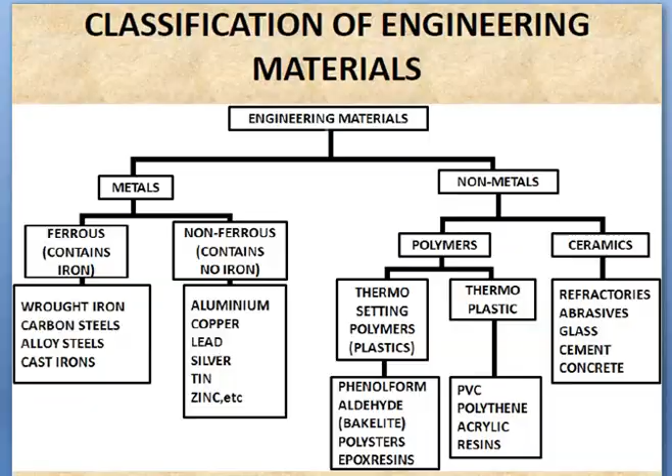The important mechanical properties of materials are elasticity, plasticity, ductility, brittleness, malleability, toughness, hardness, strength, stiffness, resilience and creep.

First we'll start with the property strength. Strength is defined as the ability of the material to resist the external forces causing various types of stresses without breaking or rupture. Or in simple words, it is the ability of the material to resist load without failure. Based on the type of stresses induced by external loads, strength is expressed as tensile strength, compressive strength or shear strength.

First, we'll look into the tensile strength of the material. Here in the figure you can see that a component is subjected to two equal and opposite forces. So here the tensile strength is defined as the ability of the material to resist a stretching load without fracture. So this is called the tensile strength of the material.

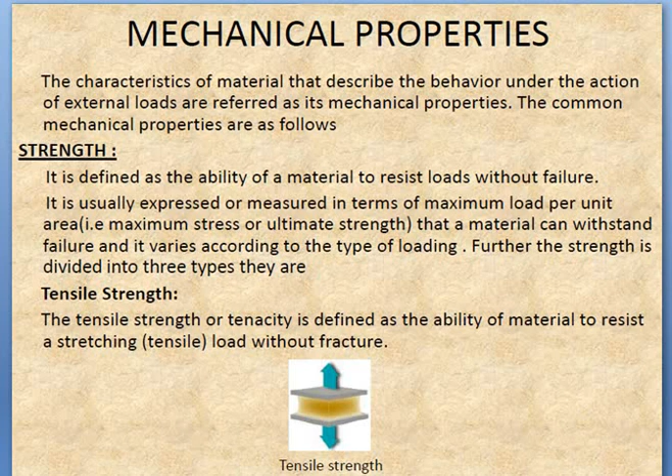Next we have compressive strength of the material. For the compressive strength, please refer to this figure where you can see the component is subjected to two equal forces which are acting towards each other. So the ability of the material to resist compression or squeezing without fracture is called compressive strength.

For the shear strength of the material, you can refer to this figure where the component is subjected to the transverse load. So shear strength is the ability of the material to resist the shear load; shear loads are loads tending to separate or cut the material. The ability of the material to resist such type of load is called the shear strength of the material. In simple words, the ability of the material to resist the transverse load is known as the shear strength.

Next we have stiffness of the material. The stiffness of the material is the ability of the material to resist deformation or deflection under the load. Within the elastic limit of the material, stiffness is measured by the modulus of elasticity. When the material is more stiff, it can resist the deformation, and when the material has less stiffness, it will deform easily.

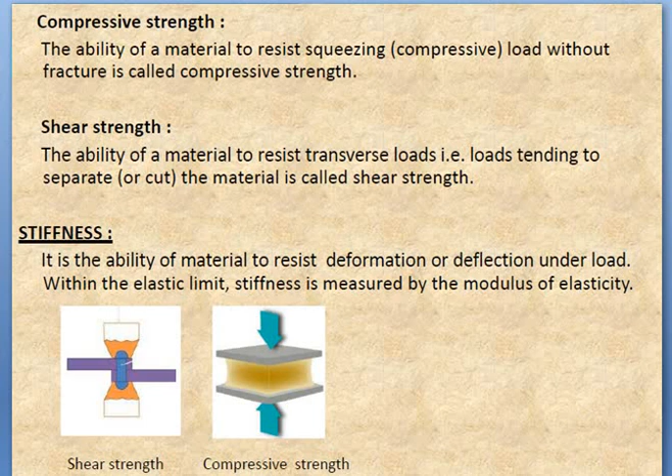The next property is elasticity. Elasticity is defined as the ability of the material to regain its original shape and size after deformation when the external forces are removed. Steel is perfectly elastic within a certain elastic limit.

Next we have plasticity. Plasticity is defined as the ability of the material to retain the deformation produced under the load on a permanent basis. This property of the material is necessary for forging, stamping, images on coins and ornamental work. So in plasticity we have to understand that whatever deformation of the material happens will remain permanently even after the removal of the load. Such a property is called plasticity.

The next property of the material is ductility. It is the ability of a material to be deformed plastically without rupture under the tensile load. Due to this property, material can be drawn into fine thin wires without fracture. A ductile material must be strong and plastic. Ductility is usually measured in terms of percentage elongation or percentage reduction in cross-sectional area of the test specimen.

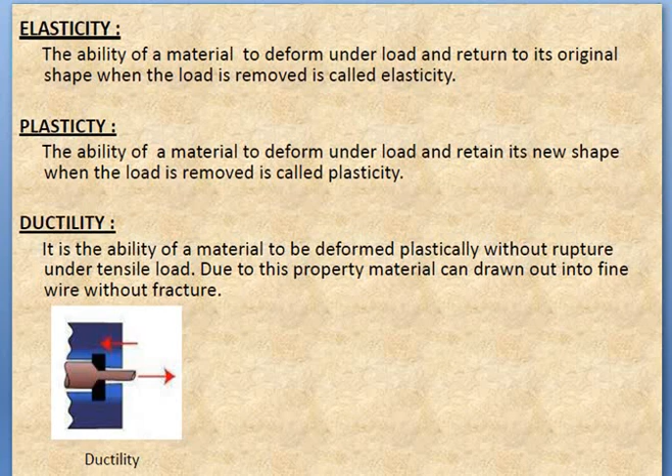Next we have malleability. It is the ability of a material to be deformed plastically without rupture under compressive load. Due to this property, metals are hammered and rolled into thin sheets. So because of the malleability property, materials can be made into thin sheets. So this is also one of the important properties of the material. Next we have toughness.

It is defined as the ability of the material to absorb energy up to fracture during the plastic deformation. Toughness of a metal offers the resistance to breaking when force is applied. Toughness is measured by a quantity called modulus of toughness, which is the energy required per unit volume of the material to cause rupture under the action of gradually increasing tensile load.

Next we have brittleness. Brittleness is the property of a material opposite to that of ductility, that is lack of ductility. It is the property of a material which shows negligible plastic deformation before fracture takes place. Examples of brittle materials are cast iron, high carbon steel, concrete, stone, glass, ceramic materials, etc. Glass is an ideal brittle material in which the stress-strain curve in tension is essentially a straight line. So we can say brittleness is the property of sudden fracture without any visible permanent deformation in the material.

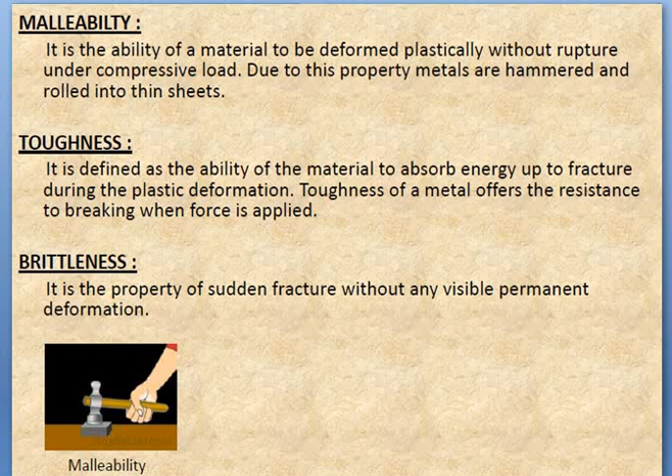Next we have hardness. It is defined as the ability of a material to resist scratching or indentation by another hard body. Hardness is directly related to the strength. Hardness of the material depends upon the resistance to plastic deformation. Therefore, as the hardness increases, the strength also increases. Tests on hardness may be classified into scratch test and indentation test.

Next we have creep. The slow and progressive deformation of a material with time at a constant stress is called creep. Whenever a member or part of a machine is subjected to a constant stress at high temperature for a longer period of time, it will undergo a slow and permanent deformation, which is called creep. This property is considered in designing IC engines, boilers and turbines.

Next we have fatigue. Failure of material under repeated or reversal stresses is called fatigue. Machine parts are frequently subjected to varying stresses and it is important to know the strength of material in such conditions. The maximum stress at which the material will operate indefinitely without failure is known as endurance limit or fatigue limit.

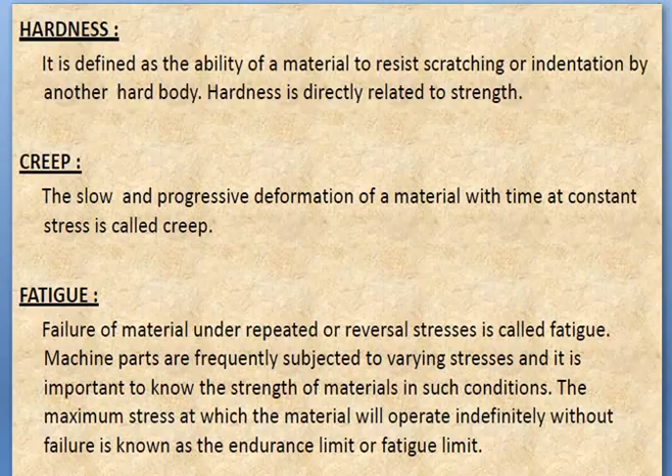So these are the important properties of engineering materials. These properties we call the mechanical properties of the materials, and these are quite important properties. The next one is resilience. It is a property of material to absorb energy and to resist shock and impact loads. It is measured by the amount of energy absorbed per unit volume within the elastic limit. Resilience is usually represented by the area under the stress-strain curve from the origin to the elastic limit point.

Next we have machinability. The ease with which a given material may be worked or shaped with a cutting tool is called machinability. Machinability depends on chemical composition, structure and mechanical properties. With good machinability, the material can be given complex shapes using the cutting tools. So it is very important to have good machinability for the material to bring it into the required shape.

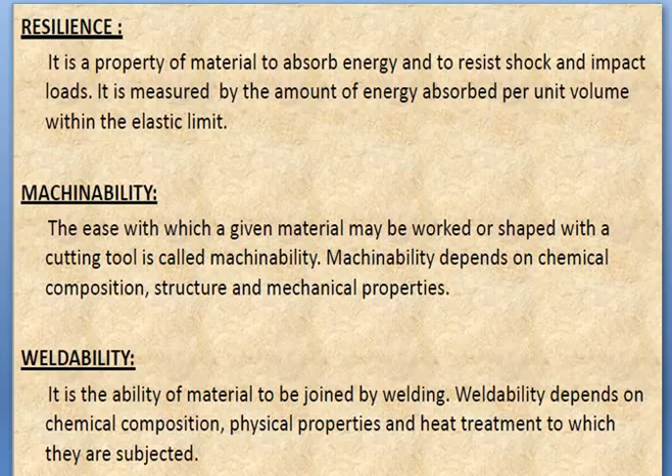Next we have forming. The workpiece is reshaped without adding or removing material and its mass remains unchanged. So that is the property of this forming manufacturing method. In forming we have hot working and cold working, such as rolling, extrusion, drawing and stamping, etc.

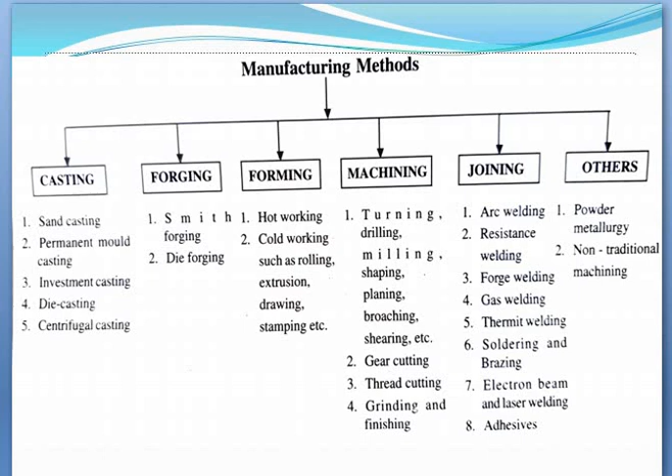So in this video, we have come across the classification of engineering materials, different mechanical properties of the materials, and manufacturing methods. In the next video, we are going to see codes and standards, their importance, and what is standardization in machine design.